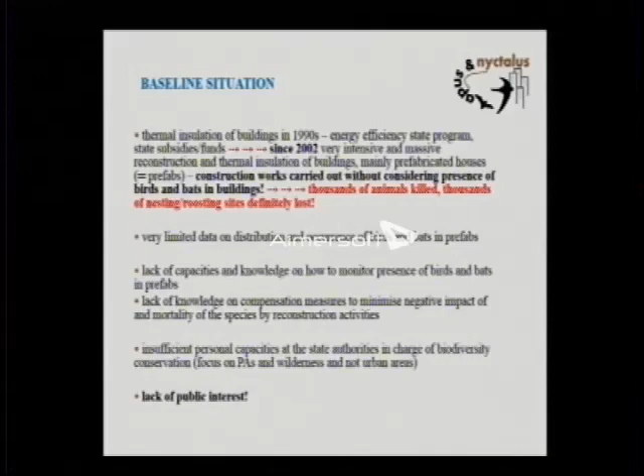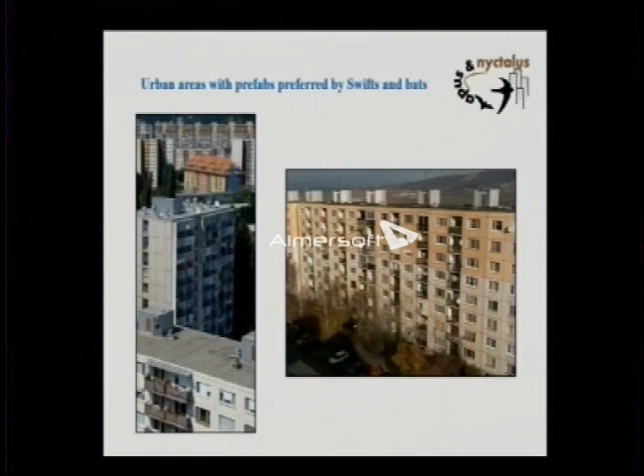To give you an overview of what I'm talking about when I say thermal insulation and reconstruction of buildings, these are the types of buildings most Slovaks live in. It's very nice, as you can see. Just as an icebreaker - is there anybody who has been to Slovakia? I know at least two people, because they attended our conference in 2013. As you can see, it's not the same as I see, for instance, in this city. And I'll explain why, because we have species using...

Pointer. Here we have species using these particular spaces in the buildings. These are crevices between panels. Usually they should be filled in with a special material, but since these buildings are 40 and even more years old, this material is already gone very often. So there are huge spaces, and bats love them. These are ventilation shafts you were talking about yesterday as well.

You can find really small spaces here in these window parts, and these are the most common places for swifts and bats. Then we have these parts where usually you can find a lot of nests of house martin, Delichon urbica, here in the corners of the windows.

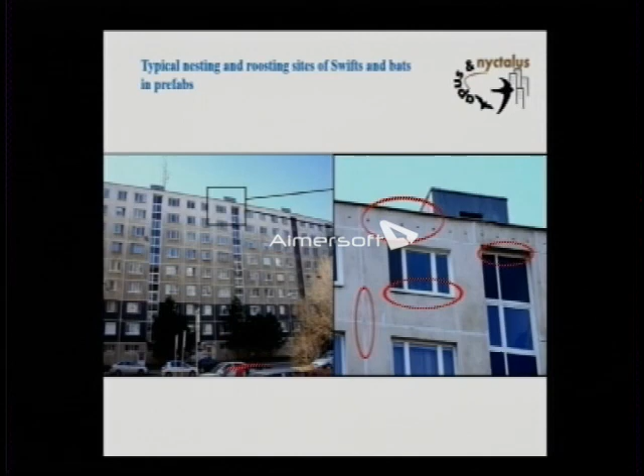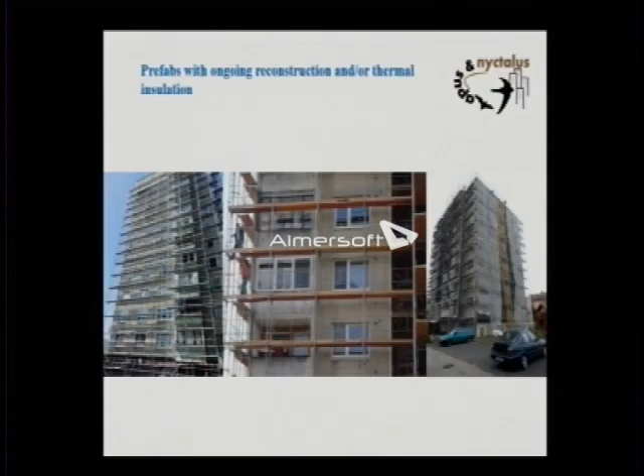And this is what's happening: thermal insulation, scaffolding, especially during the breeding season, because it's summer, it's nice weather, so it's nice to work outside, also for the construction companies. And that's what we are dealing with, actually.

So to prevent the killing of the animals, the massive killing of the animals, we succeeded in getting funds from the European Commission and from the Ministry of Environment for this project. It was a 4-year project, and we were lucky because we were able to work full-time just on these issues for 4 years at the country level, which was absolutely amazing.

We had a team of 20 full-time paid people, experts, and other external experts, and plenty of volunteers working with us. Without them, it would not be possible to achieve what I will present later on.

So the first thing that was needed was to collect data, because when we started approaching authorities asking them to do something about this, the first question was, how many bats and birds are killed, where do they live, how many of them are, for instance, in Bratislava. And the answer was, oh, we don't know, we don't have the data. Okay, guys, collect the data and then come to us and we can talk.

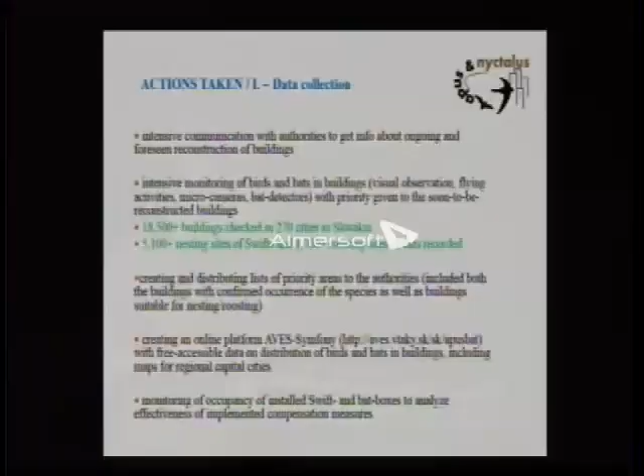So we started collecting the data. As you can see, we managed to check quite a number of buildings, not only in the big cities in Slovakia, but also in the small ones. We especially focused on the big cities at first, and then the other urban areas where we had volunteers or experts helping us to do the monitoring.

Then we analyzed the data. We created an online database which is available for free—you can download the data. But we know that people working as decision makers don't have time to check online databases, so we created what we call lists of priority sites.

Based on the data, we selected sites that are really important for nesting of swifts and bats, and we created this list for all the cities we checked. We sent this list to the relevant state authorities, which means construction officers, construction environmental offices, ministries, state nature conservation agencies, and so on.

This was just to help them have a list in front of them, so that as soon as they receive an application, for instance for a construction permit, they can check whether the building someone is applying for is on the list or not. As soon as it is on the list, they know they have to start thinking about biodiversity as well. That was very helpful.

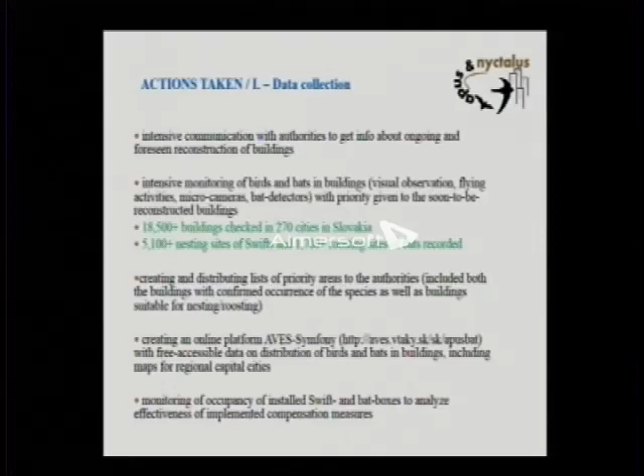As we know from previous experiences from our colleagues, for instance from the Czech Republic or Germany, it takes 5 or even more years for species to get used to it and occupy it. And if there are any other old buildings around the one they used to live in, they would prefer the buildings, not the boxes. But the boxes are absolutely a perfect solution for the future, because you are creating something for the future, when all the buildings are reconstructed.

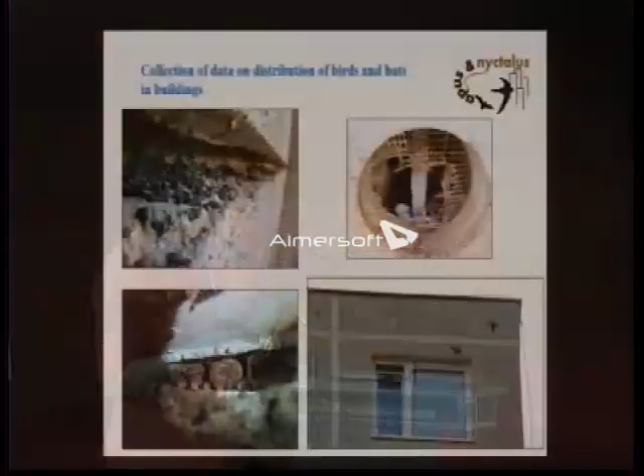As I mentioned before, these are the most preferable places, ventilation shafts, because they are deep and the spaces are big. They can host 10, even more than 10 pairs of swifts in a small space. It's a lot of space in there, in the roof.

And of course, monitoring of droppings, because that's really good indication that the species are there, although you cannot always see them, because they are hidden in the building. So this is absolutely perfect indication that there is a colony of bats.

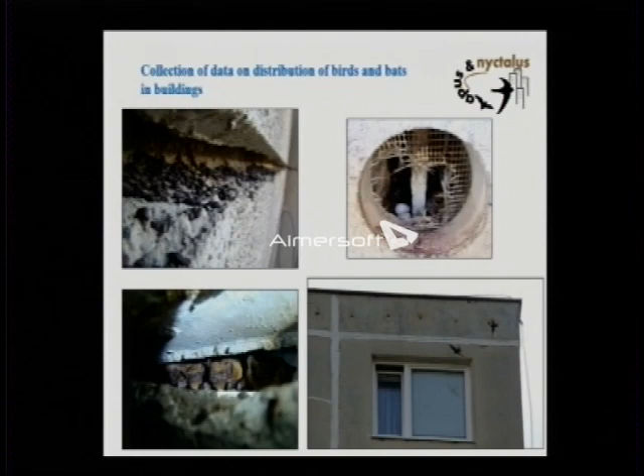What I didn't mention at the beginning is that I am talking especially about the common noctule, Nyctalus noctula, because that's the main bat species living in buildings in Slovakia. We have small pipistrelles as well, but this is the common noctule, the main species that we can find in our buildings. It's a little bit bigger than the pipistrelle, so the droppings are quite visible too.

And we created distribution maps as well. This is kind of indication of the distribution. As you can see, the main nesting sites are in the big city - this is Bratislava, this is the eastern part. This is an exception, a really small city, but there are buildings with hundreds of pairs of swifts. It's absolutely amazing, and it's a unique place in Slovakia. This is my hometown, so it's also full of swifts, which I'm happy about.

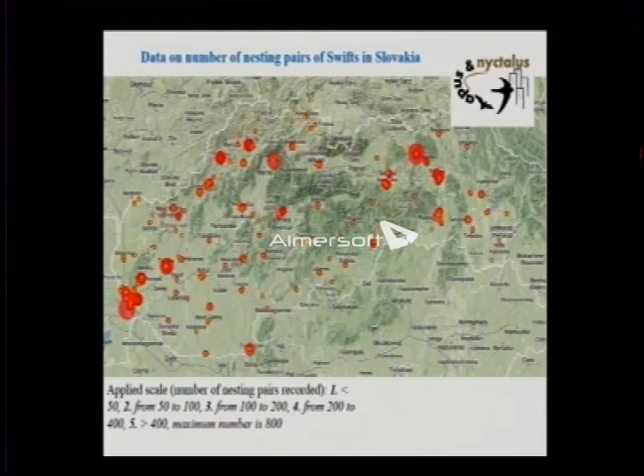And we did the same for bats, for the noctule bat. As you can see, the distribution is more or less the same, because they use the same spaces in the buildings. It's very often that in summer you find swifts nesting in a ventilation hall, and when they leave in August, then in September you find noctule bats in the same space. So they are sharing their flats, apartments, which is really nice. Sometimes they have intruders like sparrows.

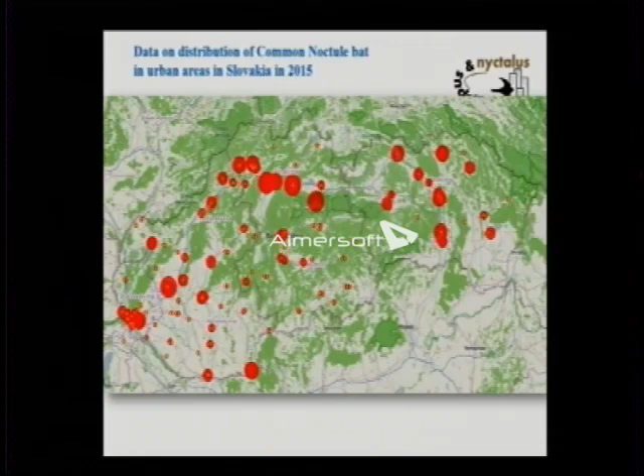We went further and created very detailed maps for big cities. These are city parts of Bratislava - this is Petržalka, like a small city in a big city, but full of blocks of flats, these prefabricated houses. And this is another part of Bratislava.

As you can see, we used different colors to specify buildings that are occupied or suitable for nesting, buildings that are absolutely not suitable - they have no crevices, no ventilations, nothing - and buildings that have been reconstructed or insulated, where the nesting and roosting sites were lost.

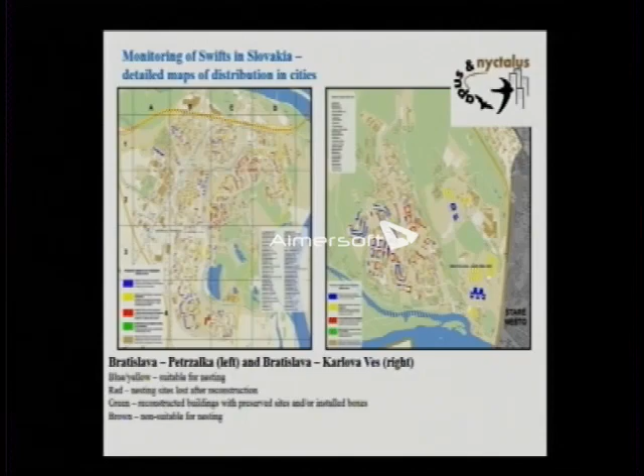So we did this for 6 big cities in Slovakia, including lists of priority localities within this part. So again, the decision makers have this as a document to help them see where they should take care of the biodiversity when it comes to making decisions regarding reconstruction and thermal insulation of buildings.

As I mentioned, one of the main problems was lack of information, lack of knowledge. And I am talking not only about the state authorities, but about nature conservationists, professional nature conservationists as well. So we started organizing workshops and trainings for these people, with not big success I have to say, because they were very busy and it was absolutely out of their thinking to go for such a training.

We managed to organize 15 of them, but we decided it's a waste of time because we had like 10 participants per training, and sometimes there was even more organizers than participants.

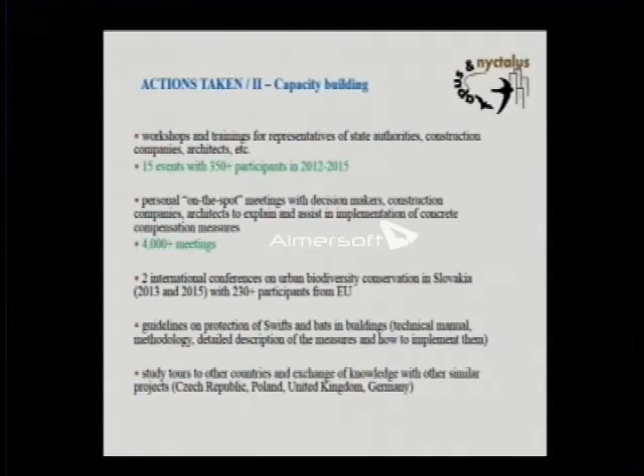So what we decided was to meet all these people on the spot. When I say on the spot, I mean that when you have a building that is being reconstructed, you have construction workers and representatives of construction companies coming to check whether everything goes well, and state authorities coming to check whether all the requirements are met. We organize meetings with these people exactly on the spot in the buildings, and we talk about the concrete buildings, concrete issues. It was absolutely perfect for them because we spoke about specific compensation measures that were supposed to be implemented on the concrete building. It was absolutely no general talk, it was to the point discussion.

And we managed to organize quite a lot of such meetings, with big success I have to say.

We used this opportunity also to show them how to implement the compensation measures, because as somebody mentioned yesterday, we had cases where, for instance, boxes for bats were installed upside down, also for birds. They could not understand why it's a problem if a bird box is installed upside down. So it was very useful to show them on the spot how to do it.

We very often use a special compensation measure to evacuate the building of dislodged birds and to prevent them from going back. I will talk about it later, but this took some time for construction company representatives and workers to understand. I am happy to say that recently when I go outside and check the buildings, they do it absolutely perfectly. So they learned how to do it over the last 5 years, and now we have one problem less.

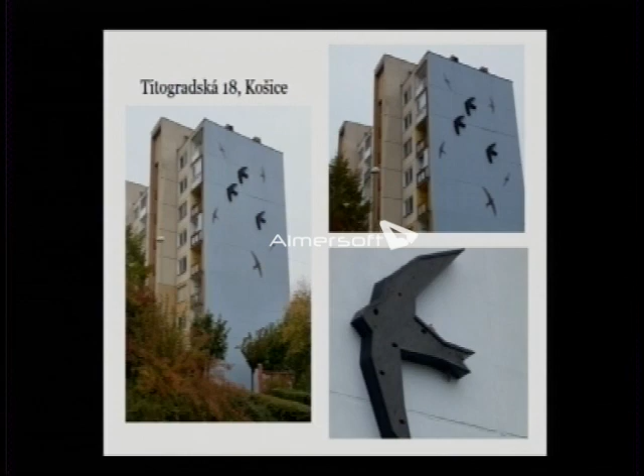Not all buildings have such paintings. This is an example, and this is another example. These are several nesting places for swifts in a box with this shape, like 3 of them here. These are just painted silhouettes, but these are with nesting places for swifts. And this is so attractive for the public that everybody was asking, oh, what's that? It looks nice. Why is that, is there something? Yes, it's a nesting place for birds, and so on.

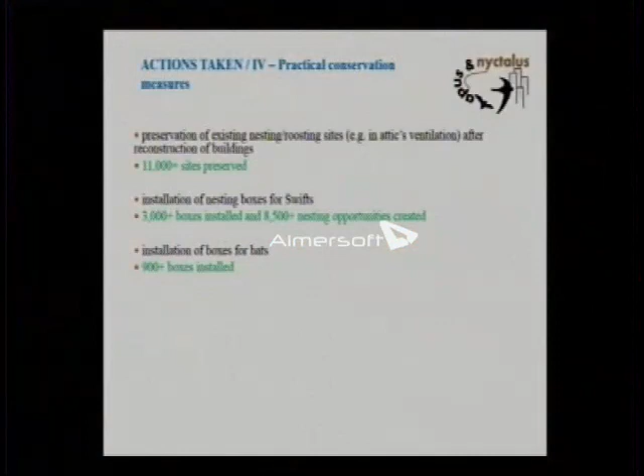And of course we did the practical conservation measures. These are just the numbers that we achieved during the project and even after, because the activities are still ongoing, although the project ended in 2015. As I will talk about later, installation of boxes and implementation of compensation measures in general has become a mandatory issue according to the legislation, which was a really huge success - I will come to it later. So you can see the numbers, I think they are just excellent numbers that we achieved, and it's becoming even more and more boxes and nesting sites preserved.

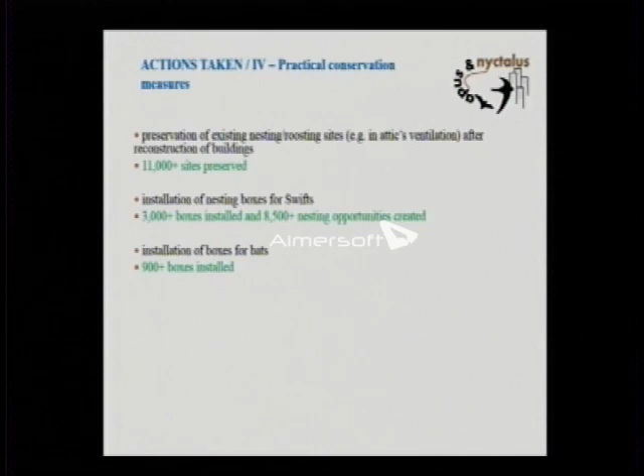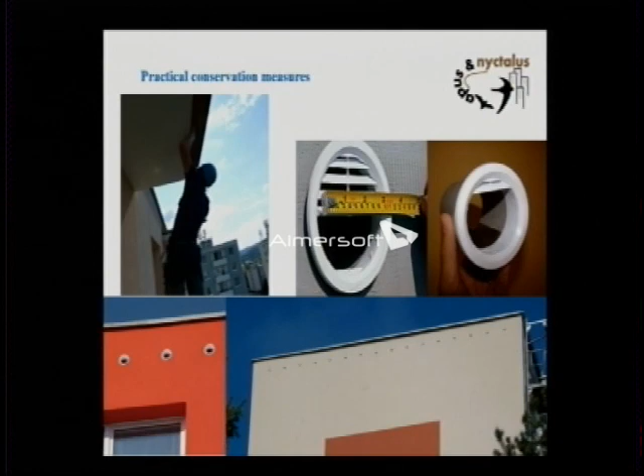Here are examples of boxes. As I mentioned, we are using these polystyrene boxes mostly. They are installed directly into the insulation.

Yesterday there was a very interesting discussion about certification of boxes. These boxes are not certified, but instead of certification, we get from the Czech colleagues an officially approved analysis of thermal flow or heat flow, comparing walls without boxes and walls with boxes, and there was almost no difference. So it's not jeopardizing the effect of the thermal insulation because it's the same material.

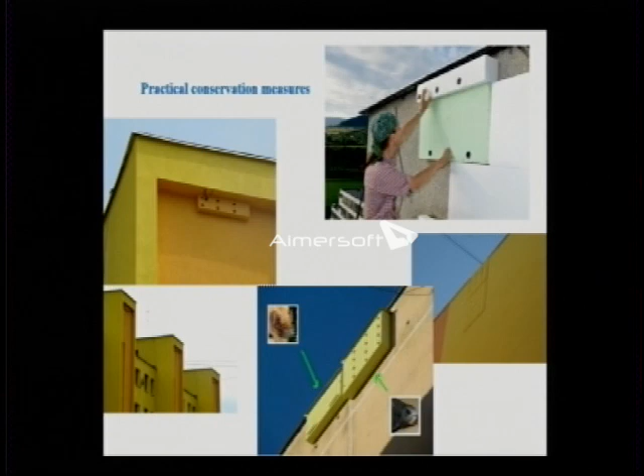And as you can see, these are the results. Yeah, the boxes are barely visible here. It depends on how thick the polystyrene is that they are putting on the wall, but usually bat boxes are not visible, just the entrances, and boxes for swifts are barely visible. You see, these are swift boxes here, and these are bat boxes here.

So from an architecture perspective, what do you think about it, how it looks like? But I think it's not that bad.

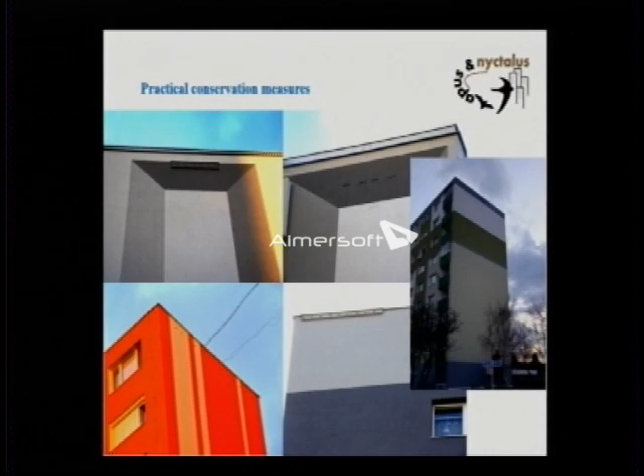It's great. It was a bit what I was talking about. Microphone. Yeah, by the way, you can ask me whatever you want.

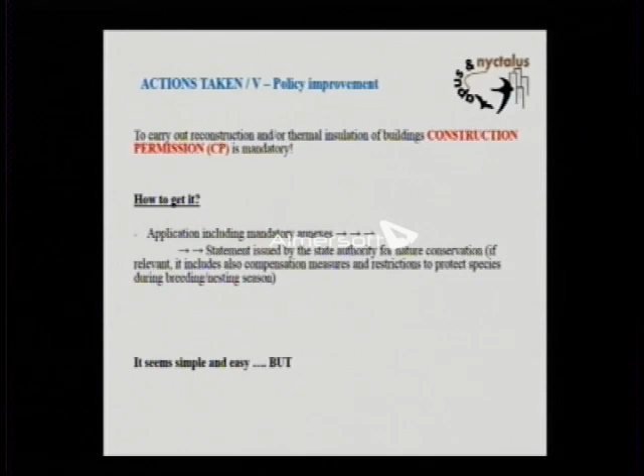And if we find something, we have several options: either to delay or postpone the construction work if really necessary, but this is the last option we apply. We prefer more friendly options, like allowing construction works to carry on even during the breeding season.

You just have to put down the part of the scaffolding protecting the nests, the upper part, to allow swifts to enter ventilation holes, for instance. That's a very easy solution. They can continue construction works and the birds can continue breeding. We have very positive experience with this—we even had falcons nesting in the building during construction works, without any problems, hatching chicks.

But of course, in these cases, we check the buildings quite regularly during the construction works. So that's the statement. As soon as I write this ecological assessment, they have to pay for it, because I'm a freelancer, I have to eat as well. So they have to pay for it.

They will take it to the environmental authority. The environmental authority will write an official statement based on the ecological assessment and will include all the preconditions or requirements I include in the assessment. Then the applicant goes with all these papers to the authority issuing construction permissions.

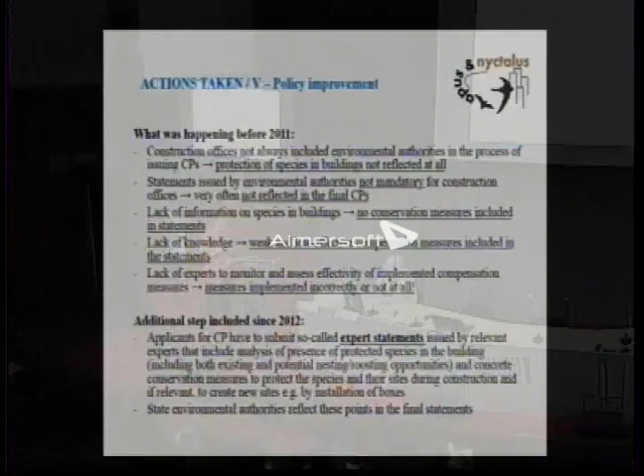Changing legislation is not an easy task, so we needed to convince authorities that the legislation needs to be opened and such issues included. It was an excellent idea of one of my colleagues: we approached representatives of the Ministry of Environment and Ministry of Construction and Transport, who are in charge of construction and reconstruction of buildings, with a document we call a guideline on protection of swifts and bats.

After several discussions and meetings, these representatives signed this document, which became a guideline for officers in construction and environmental offices on how to proceed when there's an application for a construction permission. All the issues I mentioned before, like ecological assessments and requirements, were included. It wasn't a policy document, but it had power because it was signed by high-level representatives of the ministries. It was our first step.

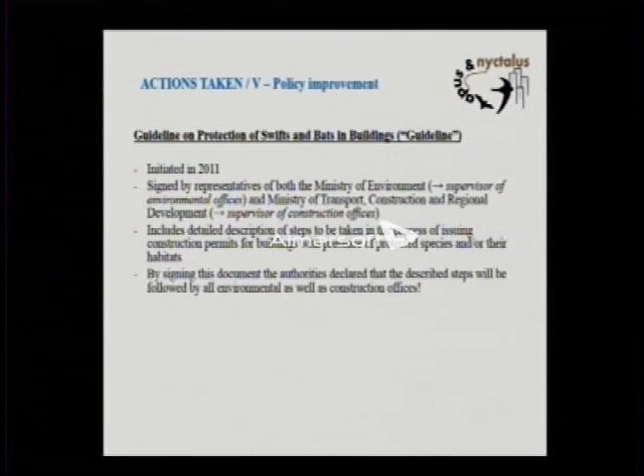Later on we were lucky, because in 2012 or 2013 the law on nature protection was opened for modification and commenting by the public and experts. We took this opportunity and started to comment on these issues. A few years before, when we started, we didn't have data, so nobody wanted to talk to us. But by 2012 and 2013 we already had the data we needed, so we came back to them with these alarming numbers and figures, and we succeeded.

All these issues were included in the legislation, and what I explained about the ecological assessment became mandatory. That's absolutely necessary if you want to secure that these things are taken care of in the future. Otherwise it depends on people, and decision makers at state authorities change almost every year, or every 4 years after elections. So this was absolutely necessary, and a huge success we achieved.

Now, as it's described there, the construction office has to ask the environmental authority for the statement and transfer all the requirements into the final document. So all the requirements are now mandatory for the applicant, the investor of the construction works. It looks easy, but it took like 4 or 5 years of discussion to achieve this.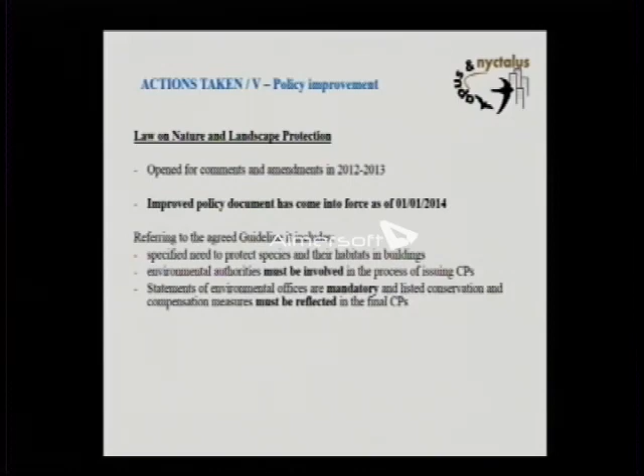We started even before the project began in 2010. We didn't succeed in including these issues in the policy documents back in 2008 — it was rejected. We were told basically what was explained here: according to the law on nature conservation in Slovakia, destruction of nest sites, manipulation of protected species, killing them and all these things is prohibited and requires permission.

But that wasn't enough, because when you're putting polystyrene on the wall of a building, you're not touching the animals, you're not manipulating them, and you're not directly destroying their nesting and roosting sites. You're just covering the entrances, preventing the animals from getting out — killing them, but not directly. So this was absolutely useless for this purpose.

So now the policy is much stronger. As I mentioned, it took some time, but you are on the right way, because you are dealing with the same problems we dealt with several years ago.

What was also very helpful and important: one of my colleagues is also a representative of Slovakia in the advisory committee of Eurobats. He presented the project and its results at the advisory committee meeting, and managed to convince representatives of other countries to develop and sign a specific resolution on bats in buildings, the first one of its kind. All signatory countries — though as I learned yesterday, Spain is not a signatory country of Eurobats, unfortunately — are obliged to follow the requirements of the regulation.

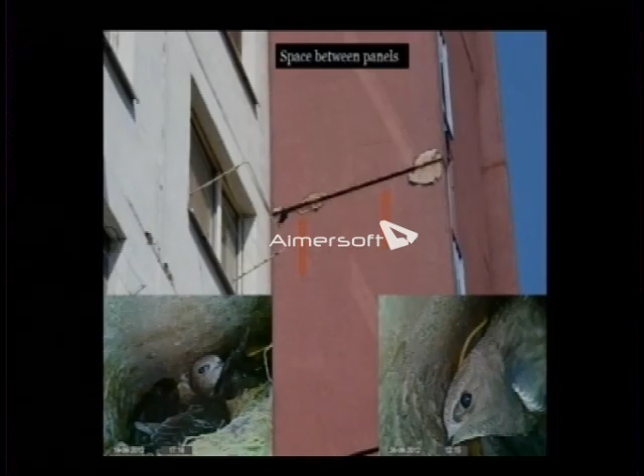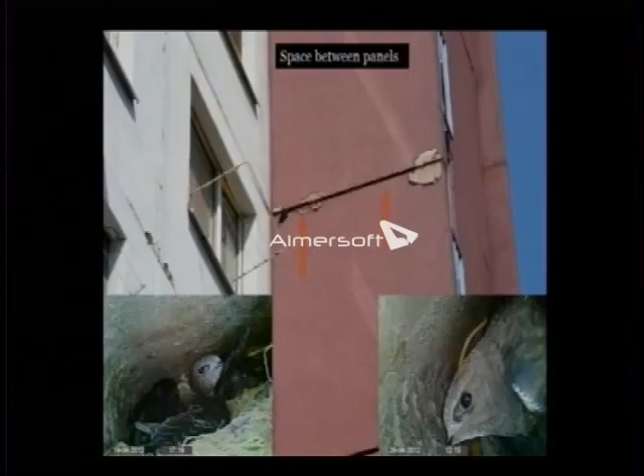There are some pictures, just examples of where the species are hiding in buildings. These are pictures taken by micro cameras. As I mentioned, it was absolutely a must to have the micro cameras, otherwise we didn't have this proof. When we were approaching construction companies saying, 'You have birds in that hall,' they'd say, 'Really? I don't believe you.' 'Yeah, take a look, and here it is.'

The plastic grids we use look like this at the end. It's very easy - there was a discussion that if they take off the grids, water will enter when it rains and cause damage. The absolutely simple solution is you just install these grids a little bit angled down, and the water goes out as soon as it's in. So it's a very easy, no-cost solution, because they are installing these grids anyway - it just takes some time to remove and reposition them.

This is a very interesting example - there was a huge colony on a bridge overpass in Malacky, full of nests of swifts. They reconstructed the bridge and had to remove the original crevices and spaces. The construction company approached us asking for boxes. We said, 'Okay, we'll give you 5 or 10 boxes.' They said, 'No, we want 40 or 50.'

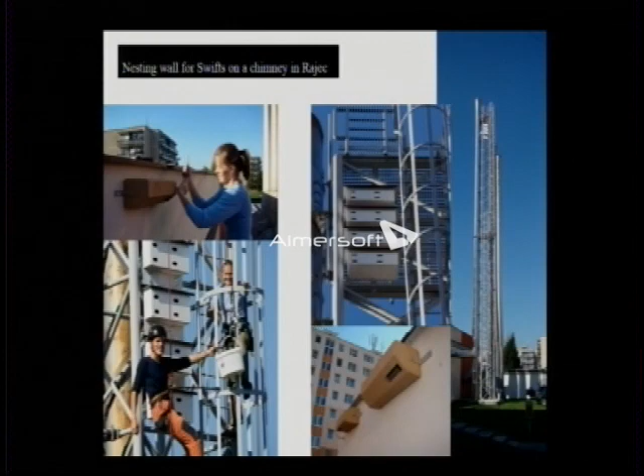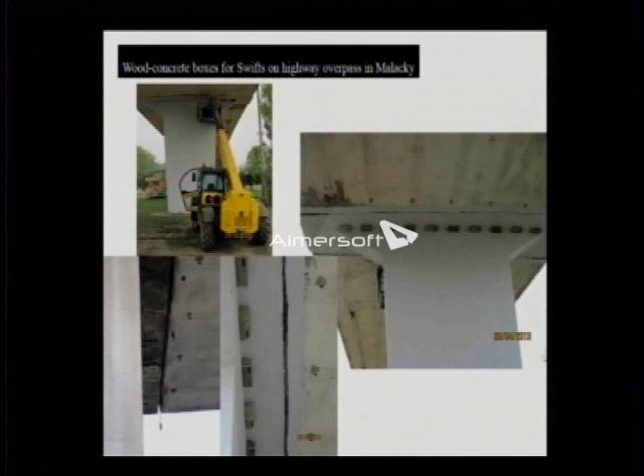Each pillar of the bridge is full of these boxes. These are Schwegler boxes, very suitable here, not the polystyrene ones - quite expensive, as you probably know. But we have, I think, 40 or 50 of these boxes on the bridge. What was even more interesting is that half of these boxes, or even more, were occupied after just 1 year after installation, because it was a huge colony, very much used to this place, so they almost immediately occupied the boxes. This was a very interesting example.

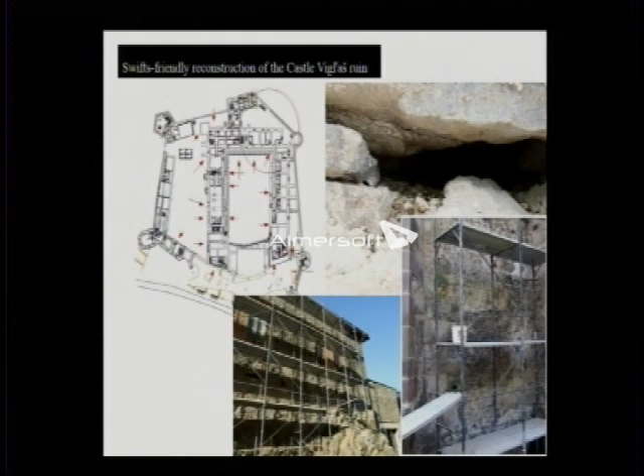Another example is a historical building - a castle in Vigľaš, under private ownership. The owner started reconstruction of the walls because they were falling apart, and of course the architects and cultural heritage officers were asking him to do something about it, so he did. On top of it, he included swift boxes in the walls, so they are hidden there - it's almost not visible. We have plenty of them in the wall, more or less in the same place where the original nests were located.

Again, it depends on people - it was the owner approaching us, not the other way around, asking whether he could do something about it, because he liked that it was full of swifts during the summer season. Visitors were looking at the birds as well, asking where they nest, so that started his interest. Another example is installation of boxes on a heating unit for a block of flats, and the owner was also very much willing to let us install these boxes here.

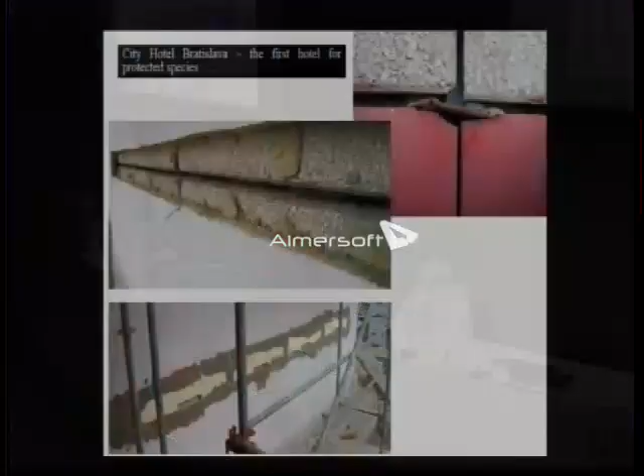I'm coming to the end, sorry. This is another example - the first hotel for swifts in Bratislava. I believe there will be more. Again, the owner of the hotel approached us asking if he could install swift boxes here, and he installed so many of them. I'm not sure if it's a good approach, because there may be too many, but we still present it as a good example. Maybe not all of them will be occupied at the end, but still, it's an opportunity for the future.

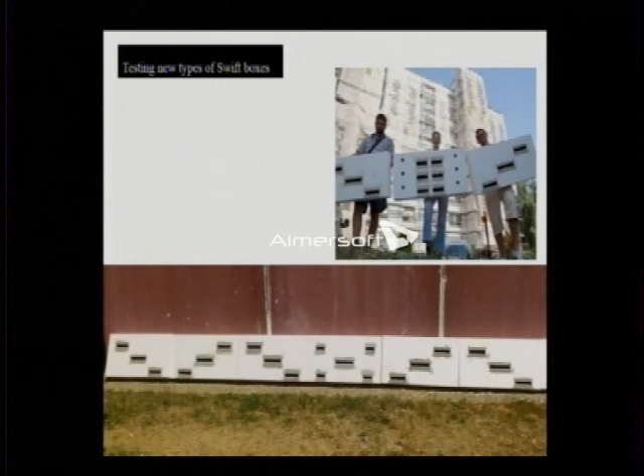Different types of boxes, different matrices, shapes of the entrances, sizes of entrances - just examples. And of course, this is an ice-breaking thing - it's a cute animal, isn't it? So, thank you very much.